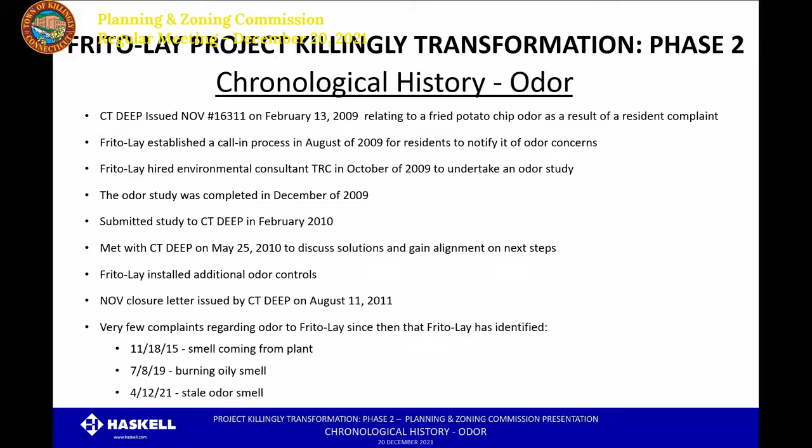Short of the mention from the last planning and zoning meeting, we do not have any recorded events of complaints there of oil slicks. In our packet, we received, that was a public comment that was given last month, and I gave you hard copies of them. So that was brought forth last month.

That was brought back forth last week, yeah. Correct. We don't have, we have no issues reported to the, as far as we know, to the town or to the state in reference to anything to that nature. So nobody ever filed a complaint then concerning that? No complaints, and we have no records of any phone-in complaints as well. So think there's 3 levels of complaints. We have someone complaining to the state, someone may complain to the town, or we get direct calls to us. For example, those 3 odor complaints were direct calls to us that we responded to.

There was another comment made at last month's meeting concerning the fact that you stated that the latest sound abatement machinery was going to be put on the building, and one of them responded, well, why don't you put that on the existing buildings? So it sounded like you made it sound as if there was something new out there, new technology that could dampen the sound even further.

Okay, we're starting to lead into our next section of slides, so don't mean to turn you off, sir, but I can follow up on that one in just a minute. Okay, that'd be fine.

Procedure-wise, let's close out the odor one first. Anybody else have questions on the odor or smell? Nothing? Staff? Nothing. Move on then, sir. All right.

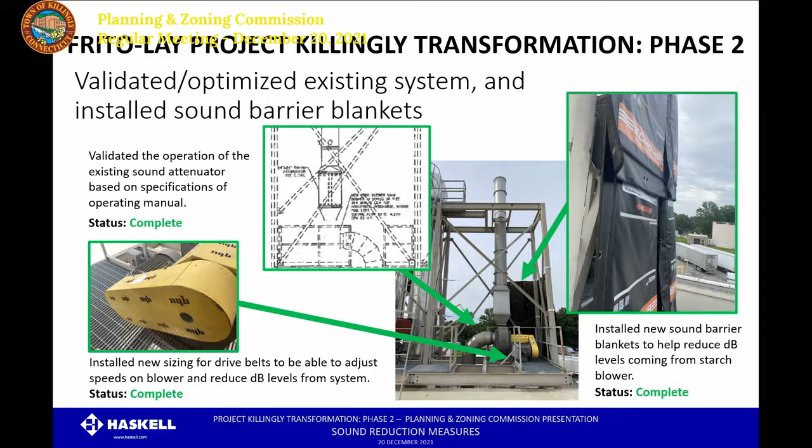So working with our sound engineer and the OEM of the equipment, we came up with a few additional things. What we're looking at here is acoustic covering that we put on the starch dryer blowers. All right, and that was completed.

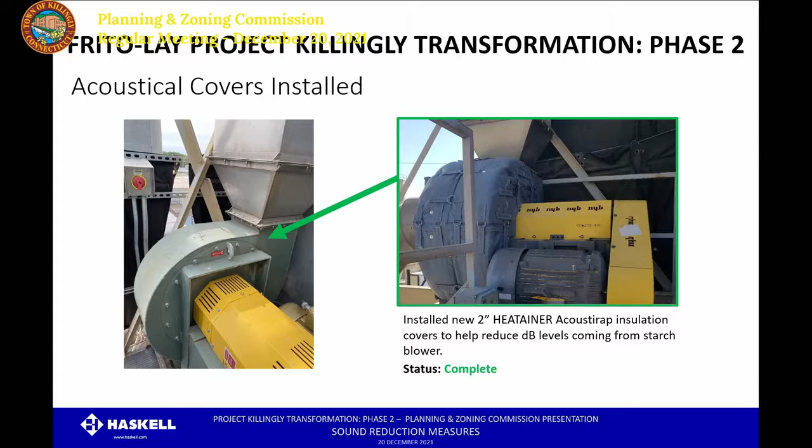And next slide, please. A couple other things you can see up on the stacks: one, we put some elbows on the top of the stacks to divert the sound to the east, away from the lake.

And the last thing we just put in a few weeks ago was the sound attenuators. Think of those as sound engineered mufflers, if you will. The existing system already has 2 of these, right after the blowers, and these are in addition to the existing sound attenuators that were originally on the system.

It took a little while to get these in, primarily due to supply chain issues around COVID and things. So we all hear about how Christmas presents may not get here. I can say from the industry standpoint, we've been fighting supply chain issues with machine parts and fabrications for a lot longer than what we currently hear.

What questions do you have? Now, in reference to your question, our sound engineer will be on after me to talk a little more about the Phase 2 expansion, in reference to how we look at engineering for the new systems that we're putting in. And he's also going to talk about his 2 noise testings that he did: one in the fall of 2020, before this equipment was added, and then one just last week after the final piece was added. So he'll discuss that with you.

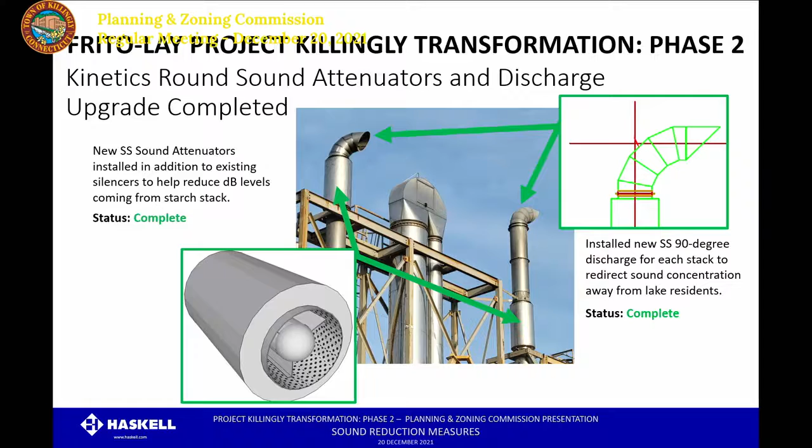And I can say after we put the sound attenuators on, it made a drastic, drastic change in what I could hear down from the potato receiving yard. It was an immediate difference that we noted. Much improved.

Questions, anybody? Okay, should we move on to our next?

So next on the video is going to be Bennett Brooks, who's a noise acoustics expert, president of Brooks Acoustics Corporation. You should all have 3 documents related to what you're going to hear now. The first is the resume and qualifications of Mr. Brooks. The second is a March 2021 summary of his first noise tests from the fall of 2020, and the third piece is his summary from just last week from the most recent testing. So, are you on, Bennett?

Yes, Joe. Thank you, and I guess if you could just start by briefly describing your background in the noise acoustics field. Sure. Thanks, Joe, and thank you to the commission for allowing me to visit with you via the Zoom technology here. I appreciate that. Yeah.

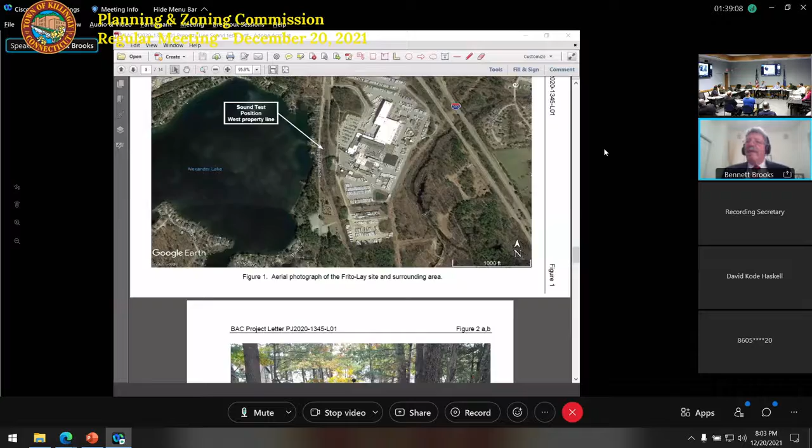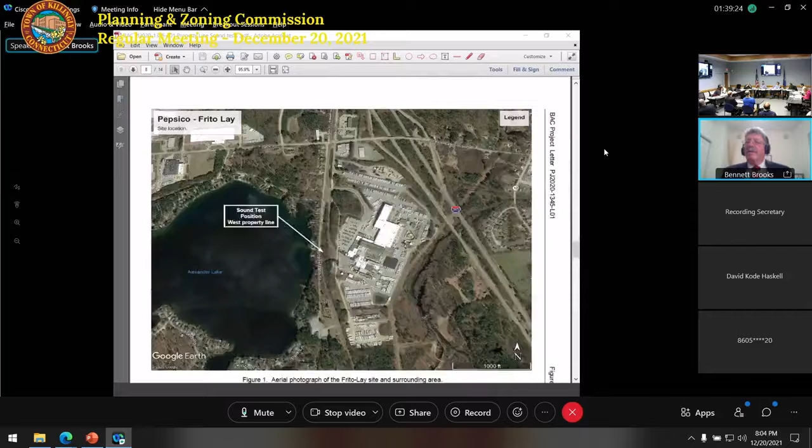If I scroll down in the report, which I believe you may have in your packet, I can go up to the top page here. You see the report dated March 8th. So this is the one I believe you have in your packets. I'll go back down, show you the aerial, and then this is the location. So I'll just slowly scroll through these pictures. You can see the sound analyzer mounted on a tripod, and it's at the location above the railroad tracks, next to a rubble wall.

And my land use and survey observations that I've made are that the old farmers who piled the rocks up knew where their property line was.

So this rubble wall has probably been there for a while, and that's the location I assumed was the property line. It looked pretty close—may be a few feet one way or the other, but probably pretty close.

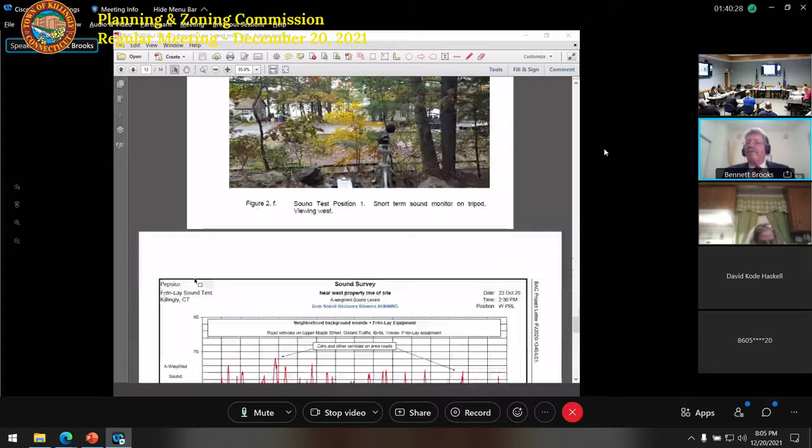So these are photos of the test site. If you look down, you can see across the road to the lake, and there's a couple other views of that. You can also see the tracks down below.

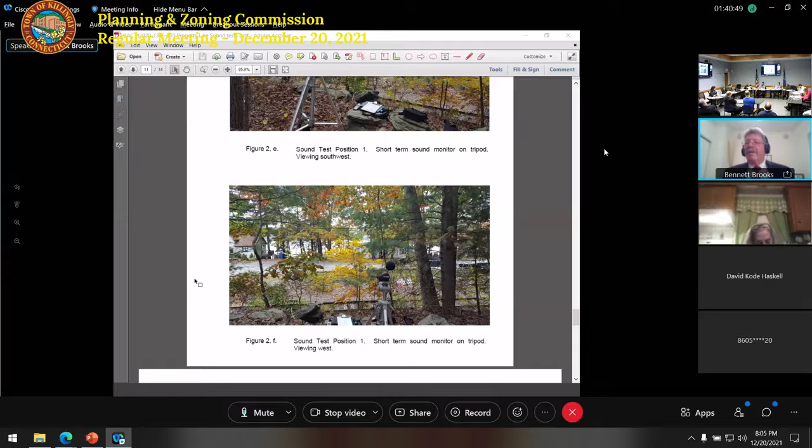So, in order to establish what was going on that could affect the neighbors, we took this position at the property line, while we were also doing sound tests at the plant. The results of this kind of test look something like the next slide.

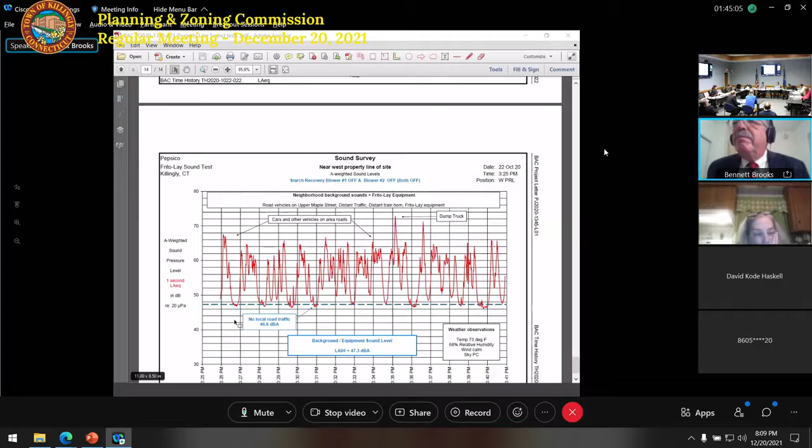Likewise, when we turned them both off, it dropped down to 47.3 statistically, noting that when there was no traffic at all, it went as low as 46.6. So we could say: no local traffic, we've got the plant, we've got other neighborhood activity. The plant is probably, without the starch blowers, in the 47 area, plus or minus, at the property line, and then drops a little more once it crosses the street.

So that's the data we took in October, and based on that and other data we took at the plant, we embarked on the sound control design study. Before I move on to that, does anybody have any questions on this part?

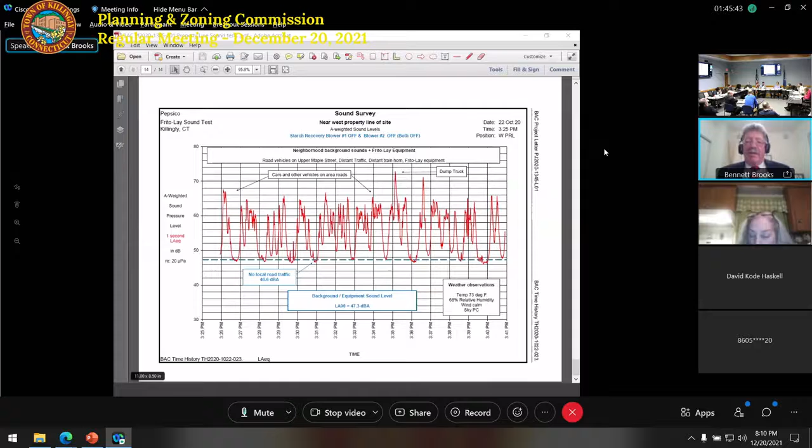Okay, let's see if I can pull up the other. Let's see, move it over here. Move things around just a moment.

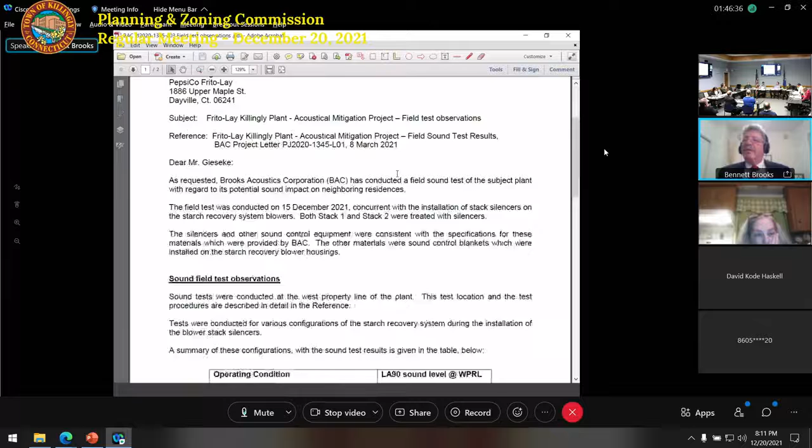Anyway, this latest memo, a project letter, identifies and documents the testing that we did last week on the 15th of December. I had the opportunity to be on site when the silencers that Sil showed you on his slide were mounted in the stacks.

That's starch recovery stack 1 and starch recovery stack 2, when they were installed. So we were able to get a series of tests, turning the recovery system on and off. While one stack was being installed, we stopped the construction process, and we did not want other machinery contaminating what was coming out, so we'd have a clean view of what we were getting. As Sil pointed out, sound control blankets were installed on the recovery blower housings.

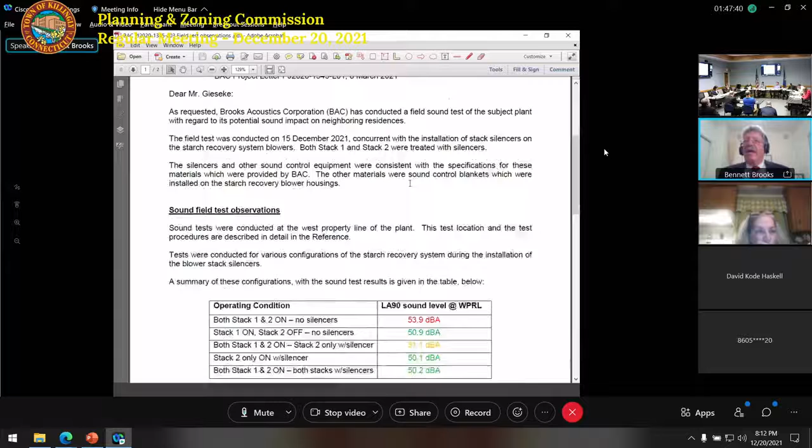We also installed the silencers, as I showed you in that picture. This table down here is a summary of the sound levels at that particular time on the west property line, the same location you saw earlier. With both stacks on and no silencers, we were up to about 53.9 for that same LA-weighted 90. The A means human hearing—that's the scale the state uses in its regulations, for the town and everybody.

So the LA90 was 53.9 with both stacks on, no silencers. Okay, let's try another one—we'll turn stack 2 off, because we were going to install that silencer. So we turned the stack off, and it dropped to 50.9 at the property line.

That's green because it indicates we're consistent with the state regulations at the property line, even though it has to be at the residence to be an official state measurement. But we're closer, so if you go farther away to the houses or the lake or anywhere farther, the sound level will drop. So we feel pretty comfortable and confident knowing that if we're meeting the regs at the property line, we'll be in better shape in other locations.

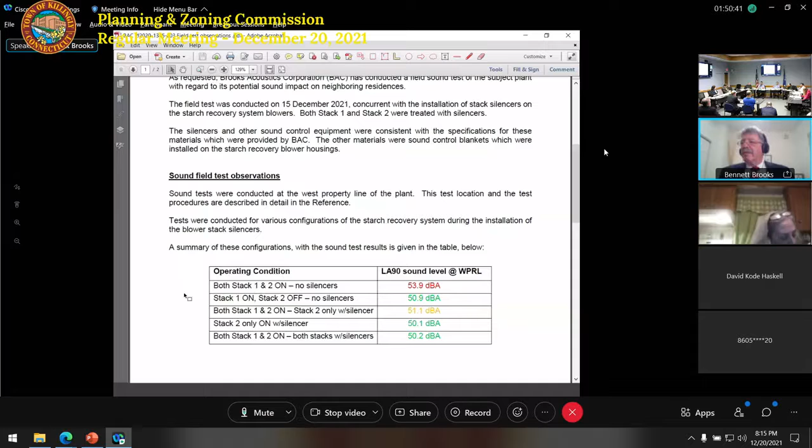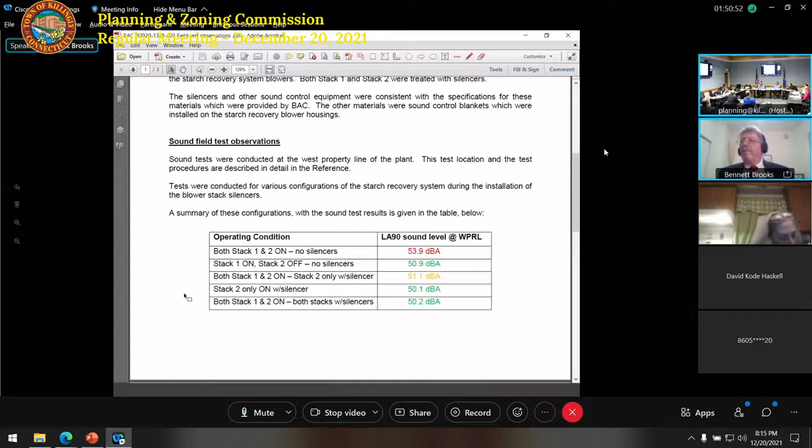Yep, okay. Well then, I will just—no, I leave that there. Yes? Hold on, there's someone here with a question. Make sure your mic's on and talking to the mic. It's on, I'll talk into it.

Anyway, looking at the column with the numbers in it, starting from 53.9 down to 50.2—can you speak up please, right into the mic, we can't hear. Okay, the worst number and the best number in the right-hand column, those are just numbers.

Is there some way that you can describe what a 53.9 sounds like versus a 50.2? Those are just numbers to almost all of us. Can you say something like the first one sounds like a screaming teapot and the second one sounds like a dove cooing? I don't know, I need verbs to describe this situation.

Okay, well, that's a great question, and thanks for bringing that up. Just to put a little more everyday reality into this, they're all actually pretty close. 54, say, being 4 more than, say, roughly 50, is a noticeable difference, but it's not a really large difference. But it is definitely noticeable.

All of these levels are—I'm going to try to—it's like a very quiet voice talking. I don't know if you heard me whispering into my microphone here, but the 50 to 55 sound level range is the sound of a quiet voice, almost a whisper. The lower end is more of a whisper, closer to a whisper. But a normal speaking voice would be 10 or 15 decibels higher than that.

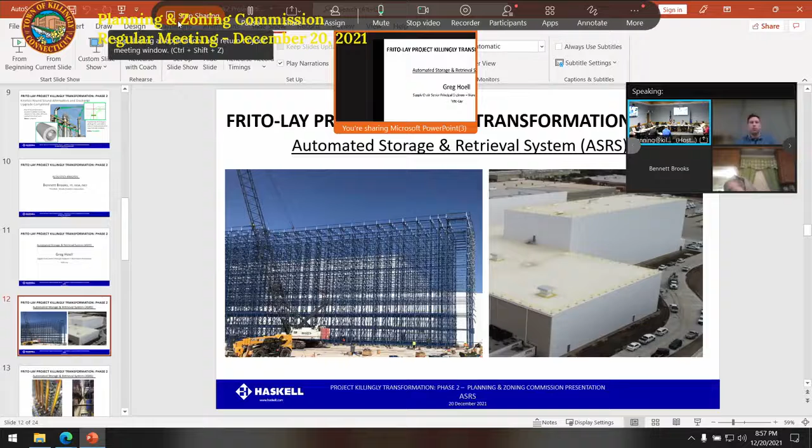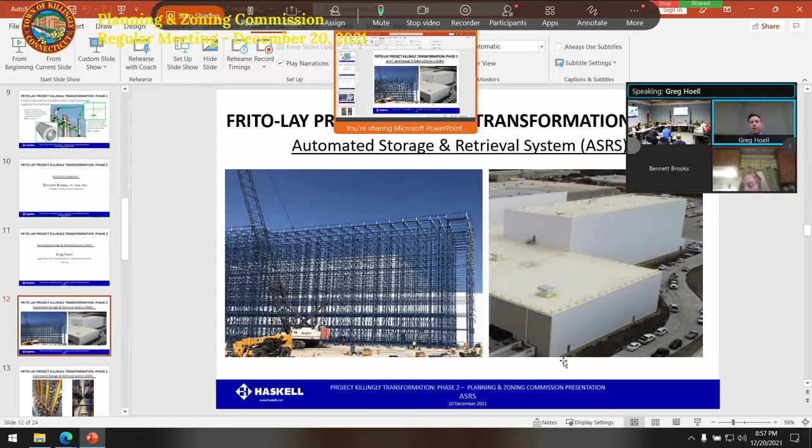Sure. Good evening, everyone. Thank you for your time. As Joe stated, my name is Greg Hoell. I'm a senior principal engineer for Frito-Lay's Supply Chain and Transformation Engineering Department, and I lead our warehouse automation group. To provide some background on my experience over the past 15 plus years, I've been in a variety of roles working projects with automation, with the last 5+ years of that within the warehouse. As Joe mentioned, I'm going to speak about the proposed automated storage and retrieval system, the ASRS, as we refer to it. In my experience, I have overseen the design, install, and startup of at least 8 ASRS at multiple different Frito-Lay facilities across the country, similar to the one being proposed.

With that stated, I'd like to move to talk about the proposed ASRS for the Killingly Frito-Lay site and provide some additional information regarding the special height permit for the 86-foot, 8-inch height of the proposed ASRS design.

So the ASRS that's planned for the Killingly facility was designed with the optimal height to maximize storage capacity and operational efficiency while minimizing the overall building footprint. The highly automated vertical and horizontal integration is a proven design for Frito-Lay.

The proposed ASRS is a 54-bay, double-deep, 3-aisle ASRS. It's intended to store 5,184 pallets of finished goods product. Frito-Lay has 12 of these 8-tier ASRS systems throughout the country, and this is the standard design for our new installations due to the efficiency of the design.

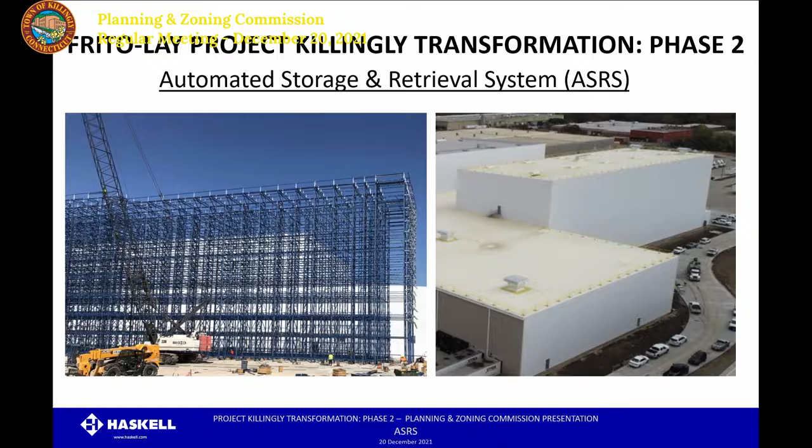If we go to the next slide, you can actually see what this looks like on the inside. The yellow masts, those are the actual storage retrieval machines that travel up and down the aisle and put pallets from conveyor into the racking for storage and pull them from the racking to put onto conveyor to be sent out to a fork truck.

What questions do you have?

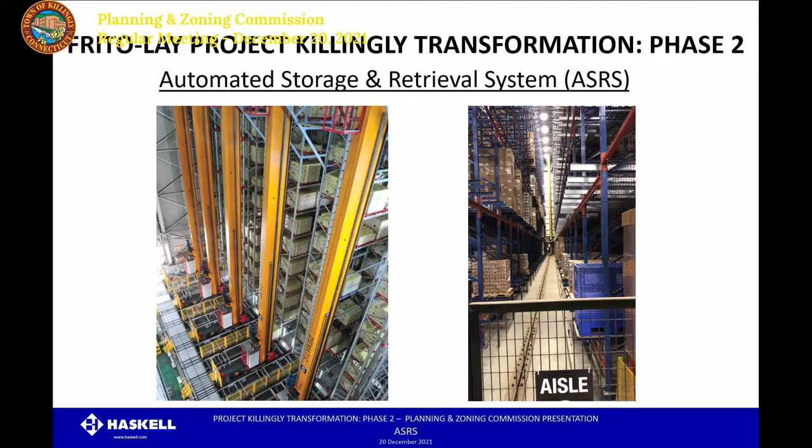I mean, just curious, if there was even any height reduction, I'm not saying to a traditional 50-foot high facility, but something shorter than what is proposed at the, what is it, 86 foot 8 inches? How would even reducing this by 10 feet, because we're thinking we're going to potentially have some sort of acoustic screening that goes along the top of the building to at least limit the overall height, how does that minimal of a height reduction impact the overall footprint? Because I think it's a drastic ask to go from 86 to 50 potentially and your efficiency, but to drop it 10 feet potentially and add the width of another bay, I don't know. That's why I'm asking the question.

Yeah, so great question, I'll go a little deeper into that. So we have a group of analysts that utilize all the historical data from our sites to develop key design inputs for these projects to ensure optimal performance of our sites. One of those key design inputs is the number of pallet storage spaces required. This group determined for this project that there was a need for 4,993 pallet areas. So as I stated before, we needed 5,100, or the system that's proposed provides 5,184 pallet areas.

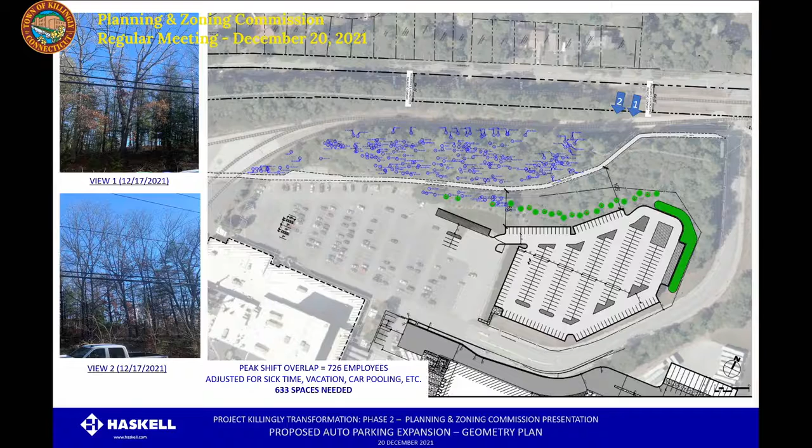Moving on to the next slide, please.

Grading and drainage. It'll be difficult to see the contours here, but the goal was essentially to recess this parking lot. It's higher than the existing, but there's going to be a 4-foot berm all the way around the western edge of the property and into the western edge of the auto parking lot and into the northwest corner of the auto parking lot. So as you're looking up from Upper Maple Street, you'll see that green space, the buffer between Upper Maple Street and the berm, and no vehicles will be visible because of that berm.

The entire area west of that will remain undisturbed, including the gravel roadway. Also, as part of this plan, we're proposing coniferous trees to be planted on top of that 4-foot berm, shown by the green circles there, to fill in any gaps from the existing vegetation.

Also, the green hatched area is the 5,360 square feet of required green space per the zoning code. We're providing 5,725 square feet of green space, and that will be planted shrubs along the embankment on the perimeter of the auto parking lot.

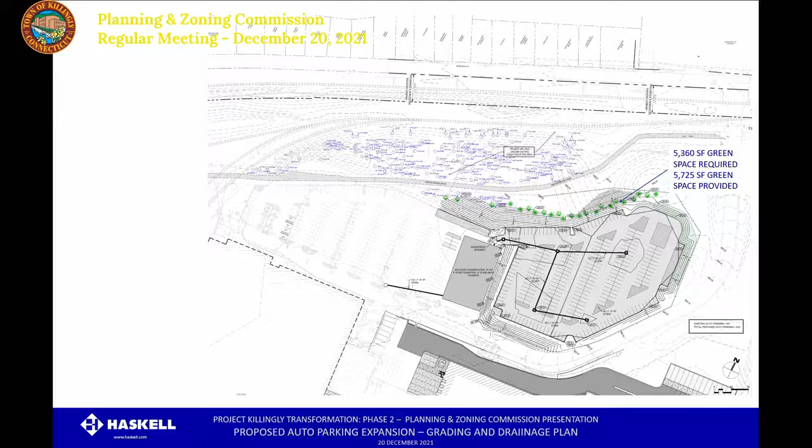We got public comment requesting an internal site traffic circulation plan. There's a couple of different color-coded items on here; I'm not going to get into the details specifically. The key takeaway is that we'll have no improvements to either entrance road and no major changes to on-site circulation from what's previously occurring out there. The entire site has two-way through traffic, and I'll get into each access point.

If there is a gate, it does have a Knox box for emergency access. There's one at the auto lot entrance where the drop arms lie. For the most part, the truck entrance, which is the red line at the far right of the page, remains open at all times, and if closed, there is access for emergency purposes as well.

So short and sweet. If there's any questions, civil, I know we were getting into lighting and some other views from Upper Maple Street. And if there's any questions from the civil site side, feel free to ask.

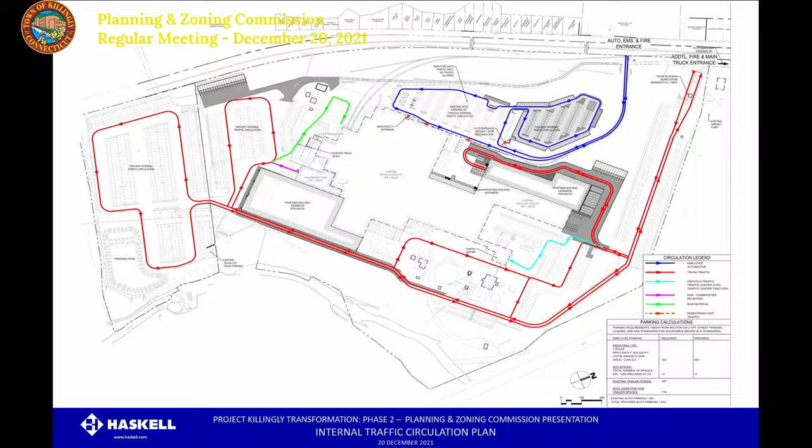Yeah, I can address that. So basically, Frito-Lay has looked in its records, and going back to the 2009 timeframe, they have not been able to determine all the back and forth that may have occurred with your staff, or whether or not a final plan was arrived at that time. But we believe we met the intent of the 10-year-old approval by maintaining, with the revised parking lot location, that forested area, which now 10 years later is quite mature. There's trees in there that are 30, 35 feet tall. And I think we heard a lot of comments at the last meeting by people about how it is an effective buffer and screen that they wanted to see remain, and now it will.

Well, wasn't there a railway expansion in that same area between now and then that also eliminated tree buffering?

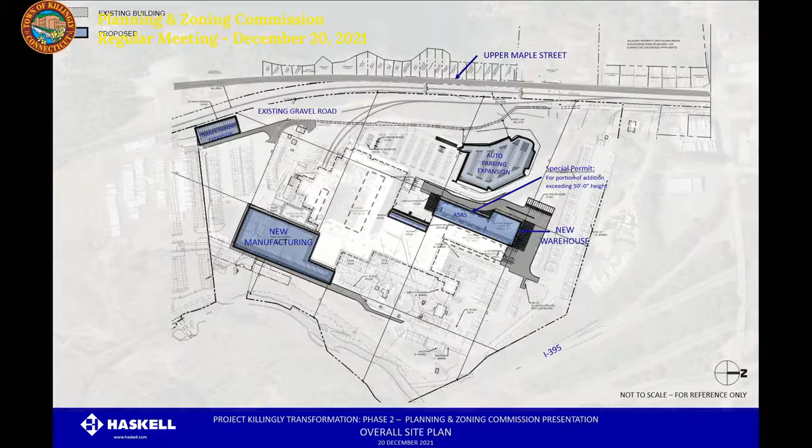If we could, I think we need to advance a couple slides here to catch up. Yes, if you would pick up. These hash marks here are contours, I'm assuming. There's no elevations there. Can you explain what that is for me?

Repeat the question, we could not hear that. So the question was about the gore striped area going from the side of the ASRS to the low bay. Could you advance the two slides, and I think we'll be looking at what the chairman is looking at. Thank you, I think that's it.

What he's looking at, what his question was about, was the corner area from where the ASRS is to what we call the low bay, which would be to the right-hand side of the drawing. That corner in there, you see there's some striped lines in there. The question was, is that an elevation change? And the answer is that's not an elevation change. What that is, is just a gore striped area to delineate the traffic pattern.

There's also a post indicator valve for the fire suppression lead-in that lies within that gore striped area, and I believe there's bollards and guardrail as well. Okay, I just wanted to see what that was. If we could back up two to the beginning of the lighting slides, we can go through those quickly. Thank you.

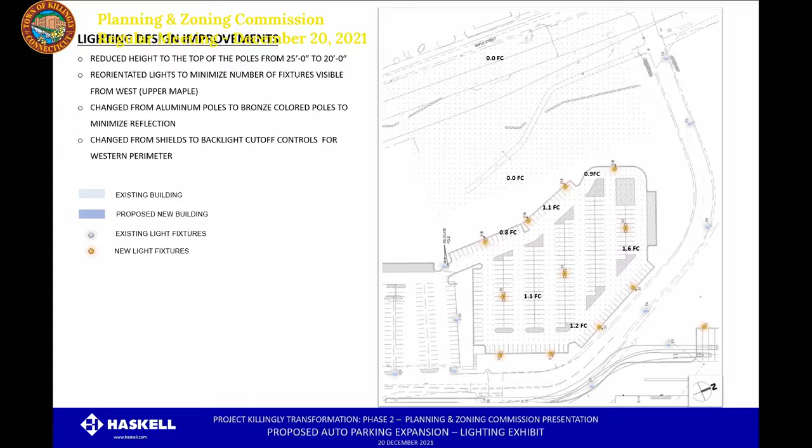Basing on the input from the previous meeting, we looked for solutions to address each of the comments presented to us, and at the same time improve the lighting design. For the auto parking lot, we reduced the height of the pole from 25 feet to 20 feet. We also reoriented the lights to minimize the number of fixtures visible from the west. We changed from aluminum poles to bronze colored poles to minimize reflection of the light on the poles, and we changed the optic from shields to backlight cutoff control for the lights on the western perimeter of the lot. Can you go to the next slide?

Okay, what is the backlight cutoff control? That is an optic solution that directs the light forward, controlling the light trespass. Also, the small optic of the lamp optimizes the amount of light that goes from the lamp to the point of light. In addition, this solution allows wider pole spacing and uniformity in the solution.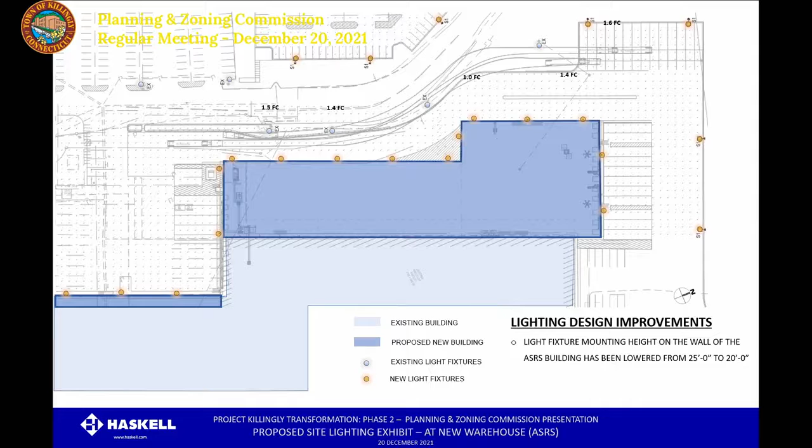So we want to continue? Yes, I think we're back to David Cody, who I think has the last slide. Right, 2 slides, thank you. Looking forward to the next slide.

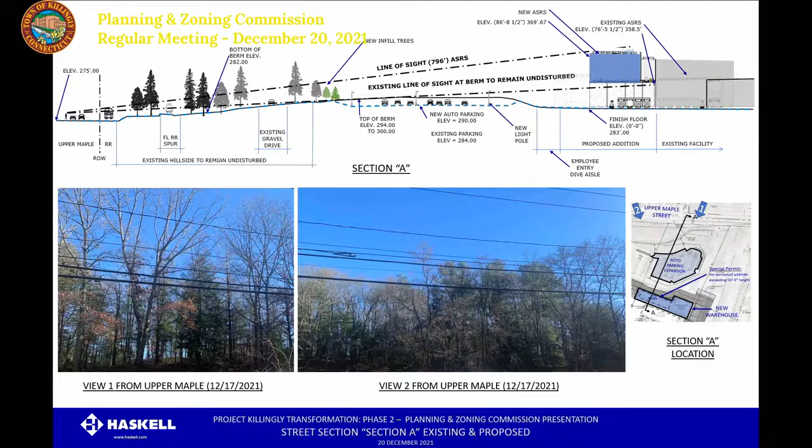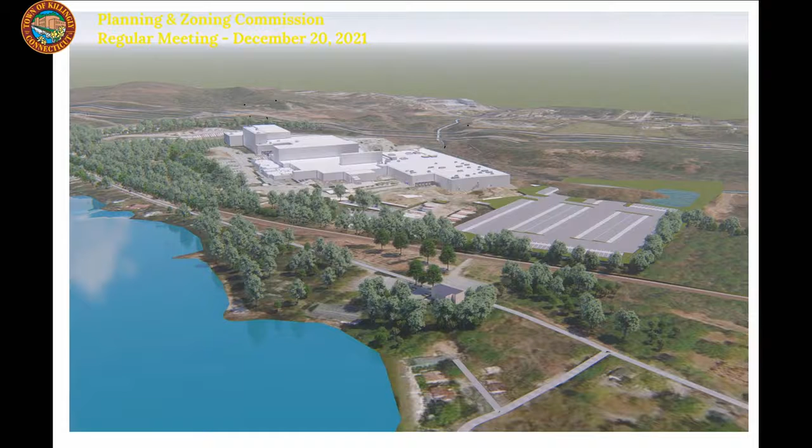So will the new building be exposed above the tree line? No. Next slide, please - that'll conclude the presentation from our side. Joe, I'll turn it to you. Any further questions at this point? If not, Commissioners?